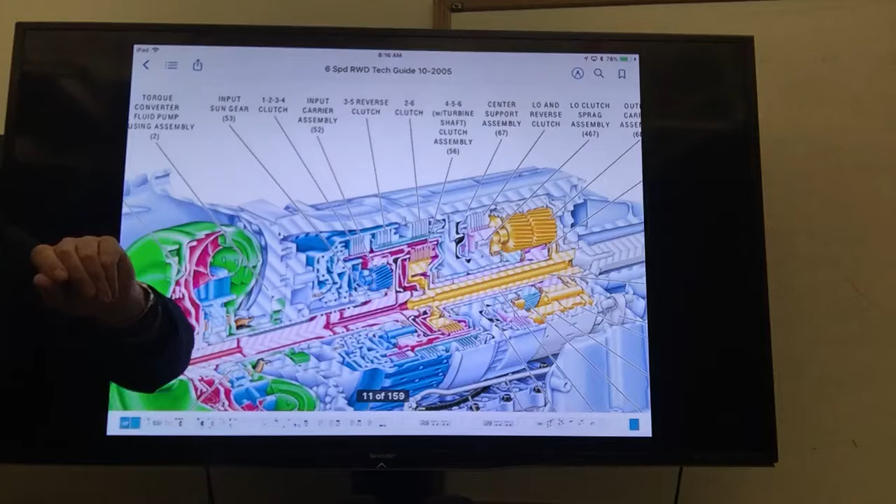So looking at this transmission right now, there are some things already familiar to you. There are how many sets of multiple disc clutches in here? 1, 2, 3, 4, 5. Three of them were used to transmit torque, two of them were used to hold something from turning, so they're steels that bind to the case. It's very similar to what you saw in the 6T70s, where you had two that were used to transmit torque and three used to hold something from turning. But again, five sets of clutches.

And they're named in a similar fashion too, you'll notice that. The 1-2-3-4 clutch is used in first, second, third, and fourth, so you know that's going to be applied in those gears. The 3-5-reverse clutch, you know it's applied in third, fifth, and reverse. Your 2-6 clutch is going to hold something from turning. Your 4-5-6 clutch is part of that turbine assembly, so that's going to transmit torque to a component. Here's where things get a little different though.

The planetary gear set arrangement on this transmission is a little different from what you've seen in the past, and that's because it's using two planetary gear sets, but one is a compound planetary gear set.

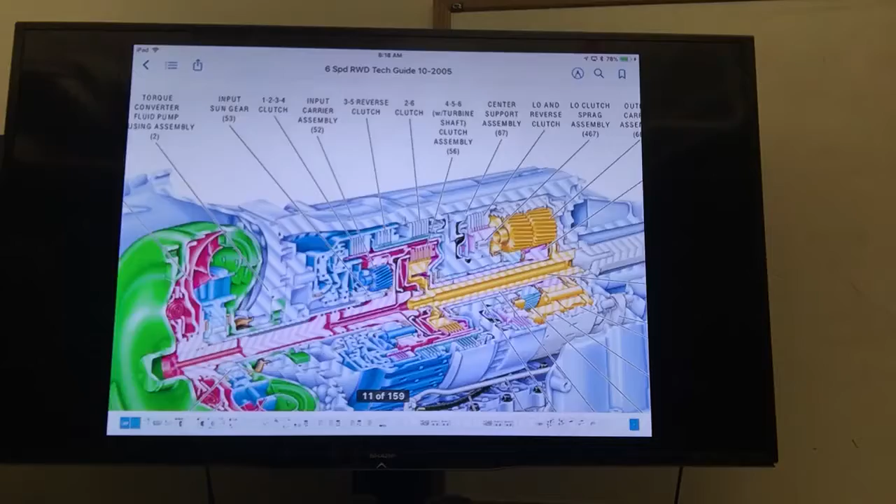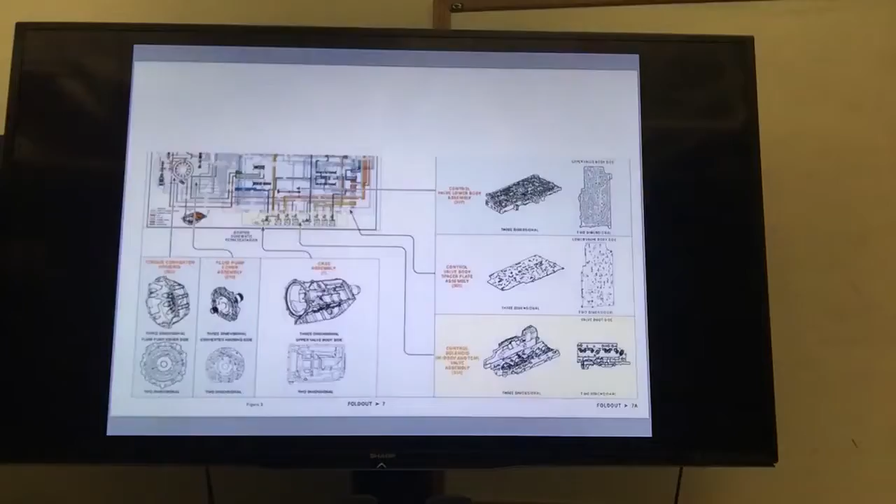So before we go on to the planetary gear sets, let's try to get a look at what these clutches are doing. There's another picture here I want to find that makes it a little easier to see. And I'm not finding it... yeah, that's the one I'm looking for.

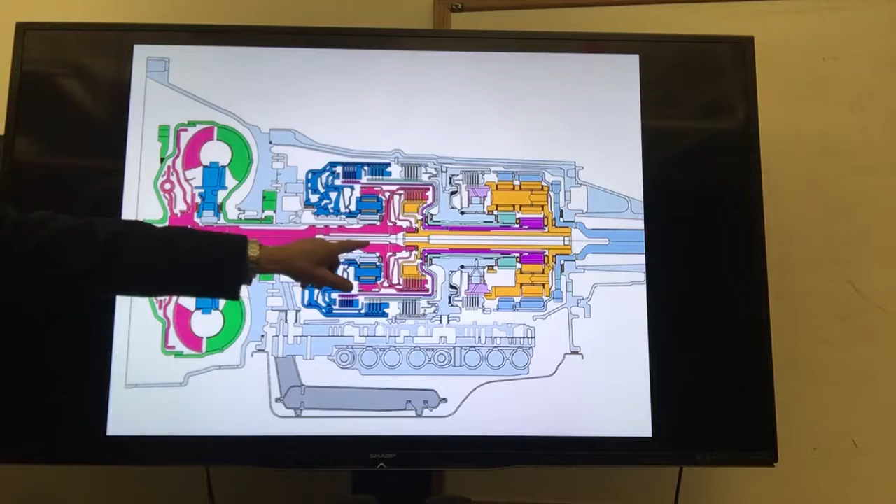So here's our, what was this, the 1-2-3-4 clutch? You guys have this opened up by any chance? You can open it up to keep me honest here. So torque is going to come into our turbine shaft, or input shaft assembly. That's going to be transferring torque to this housing, which is where that 4-5-6 clutch is. It's also transferring torque to this component here, which is the input internal gear.

So this is one of the planetary gear sets we have on this transmission. It's called the input planetary gear set. That suggests it's going to be an input for torque coming into the transmission, and it is, in fact — it's connected to the turbine shaft. So when our turbine shaft is rotating, we're going to be transferring torque to the input internal gear.

That's going to transfer torque to the input carrier pinion gears. The input carrier pinion gears are going to walk around the held input sun gear. The input sun gear is splined to the stator shaft on this, so that's kind of different — this input sun gear is splined to the case basically all the time. So all of our torque into the transmission is going to be going through that input planetary gear set.

The input carrier is going to transfer torque to this housing. The input carrier is the output. Whenever the carrier is an output, we get what? Reduction — so we're going to get some mechanical advantage there.

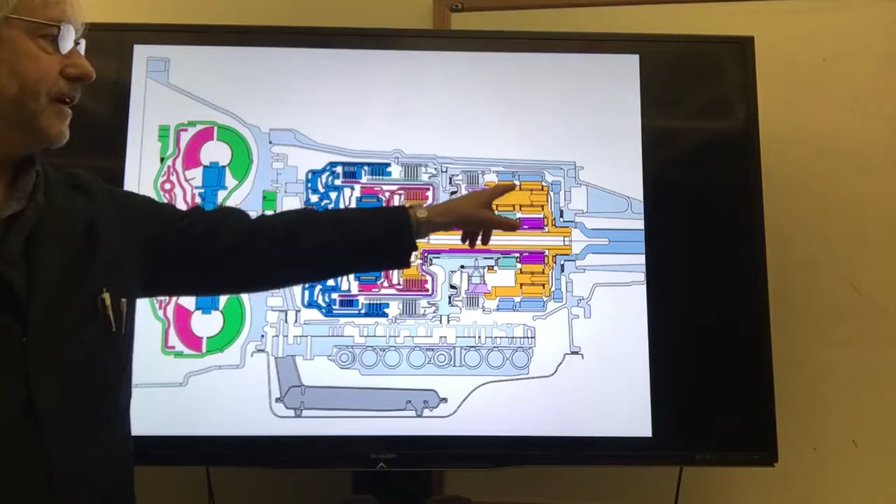Right here, notice that these clutches, which I think are our 1-2-3-4 clutches, are splined to this housing, which if you follow it comes all the way down — looking at the color now — to this sun gear. This is our second planetary gear set. It's a compound planetary gear set, a Ravigneaux planetary gear set, as it's called.

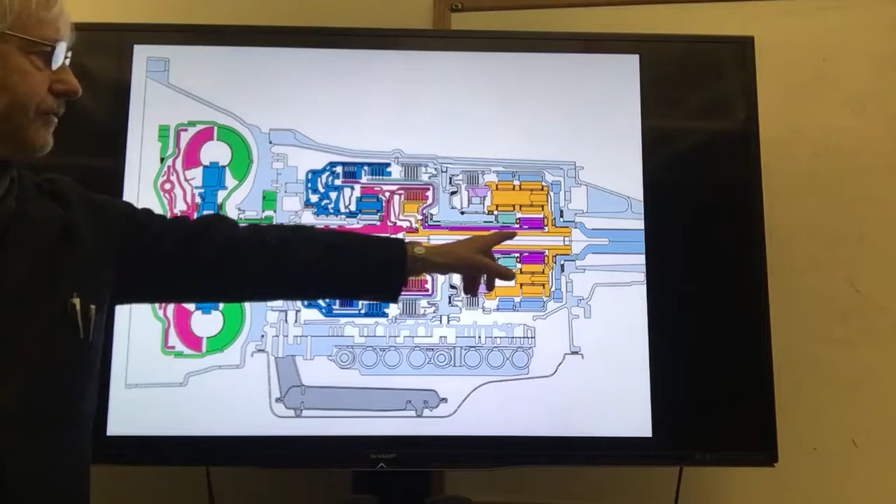That's unique. This is different than what you've seen in the other transmissions you've looked at. This housing is going to transfer torque to that sun gear, the output carrier rear sun gear.

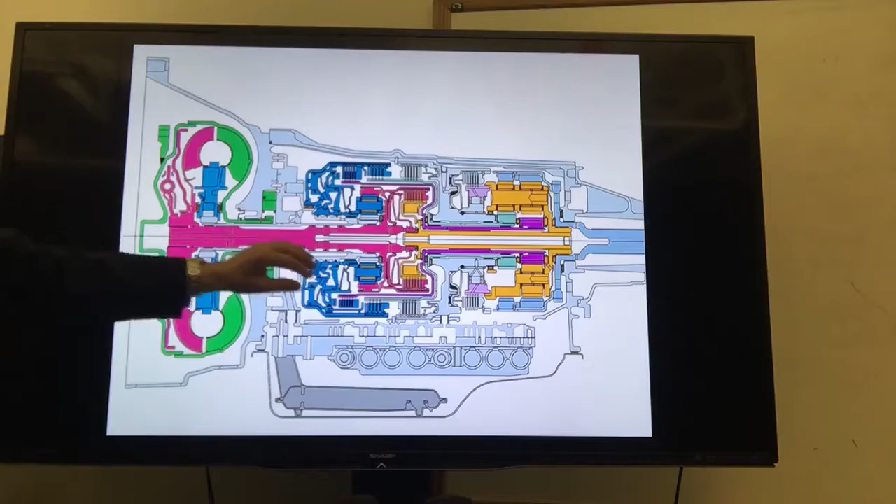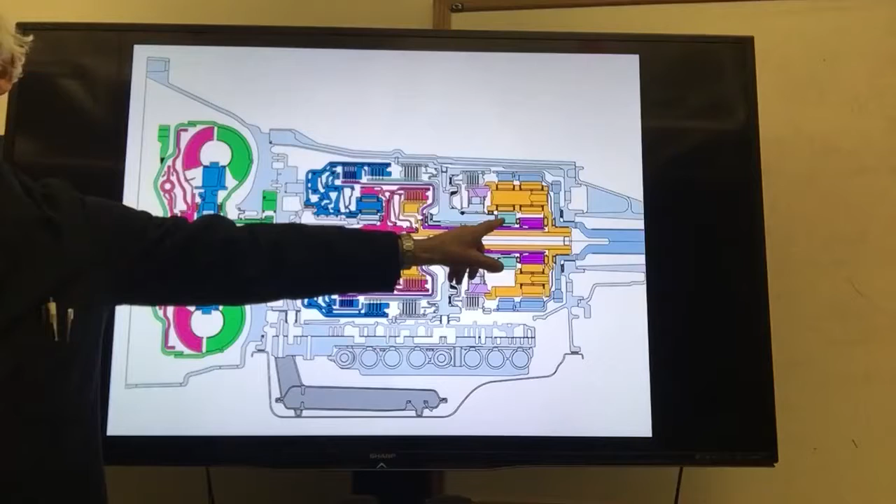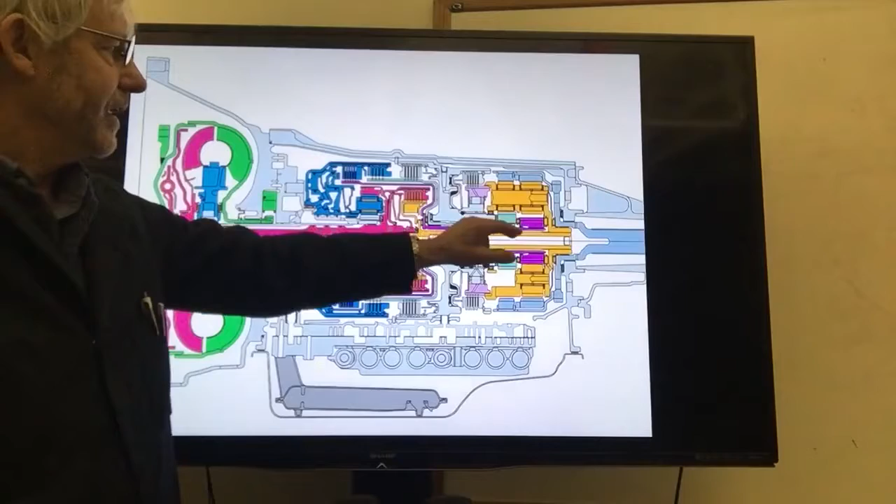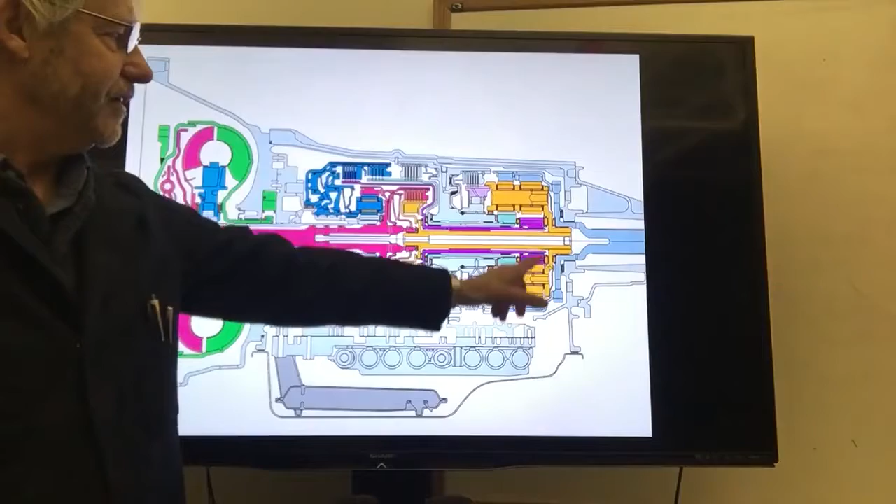This is called the output carrier. We have an input planetary gear set and an output planetary gear set. The output planetary gear set has an output sun gear rear and an output sun gear front. It also has a planetary gear set with multiple pinion gears connected as one piece. I'll show you another picture in a minute so you can see that. Then we have our output internal gear, which is in mesh with both the output rear outer planetary gears and the output front planetary gears. So our planetary gears here include output rear inner planetary pinion gears and output rear outer planetary pinion gears.

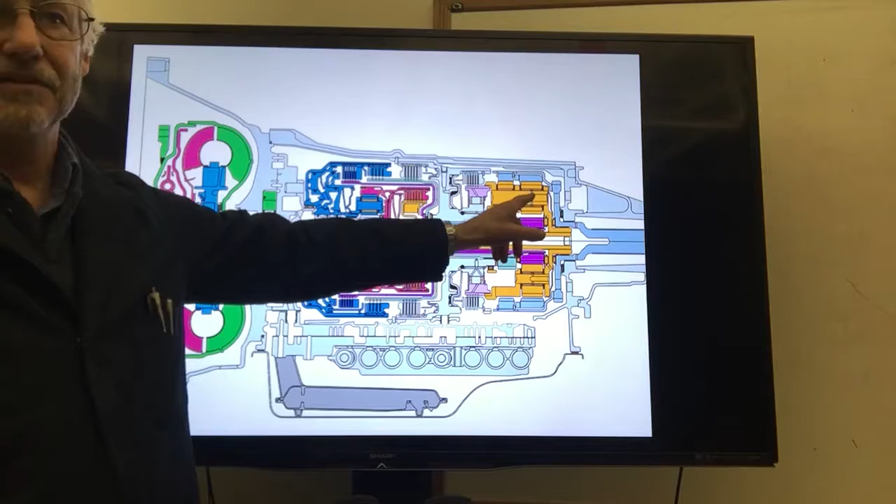We're going to revisit that again in a second. In first gear, we have clutches 1, 2, 3, 4 applied, and our low reverse clutch is applied for first gear engine braking. But for first gear without engine braking, this clutch is released.

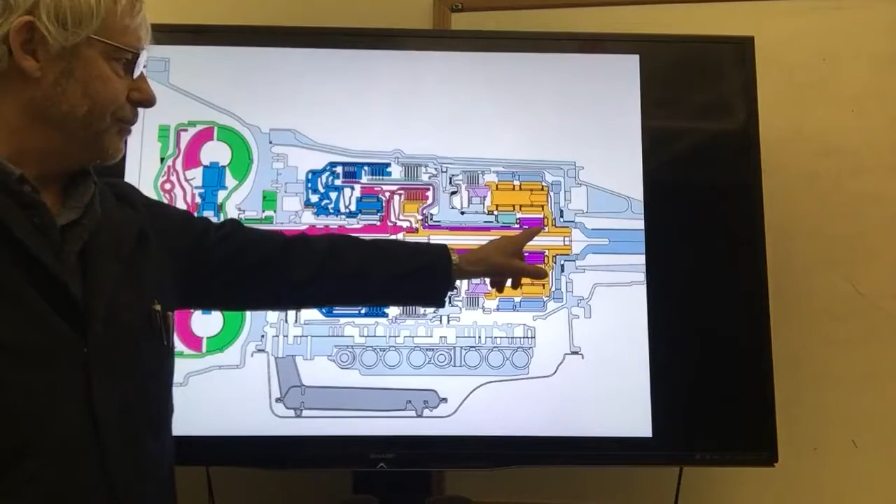Here's where some things are going to look similar, because we're transferring torque from the input planetary gear set to the output sun gear, the rear output sun gear. That's going to transfer torque to our rear output inner pinion gears, which then transfers torque to our rear output outer pinion gears, and then to our rear output internal gear for first gear.

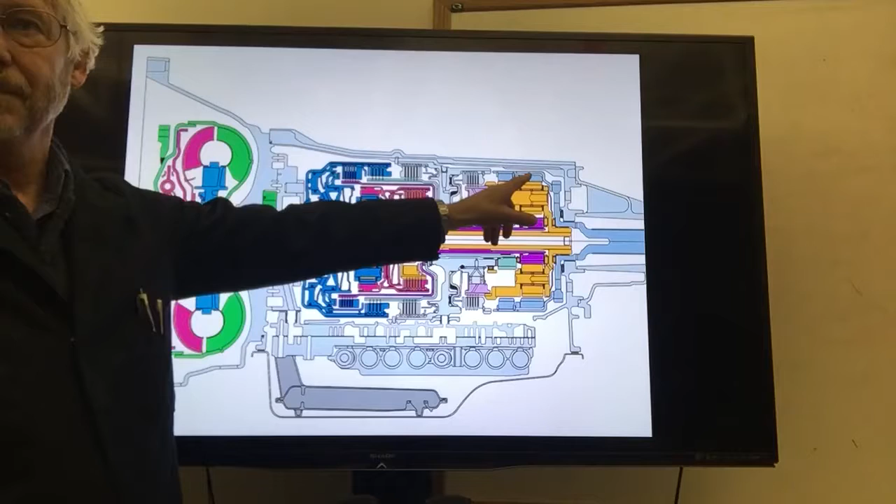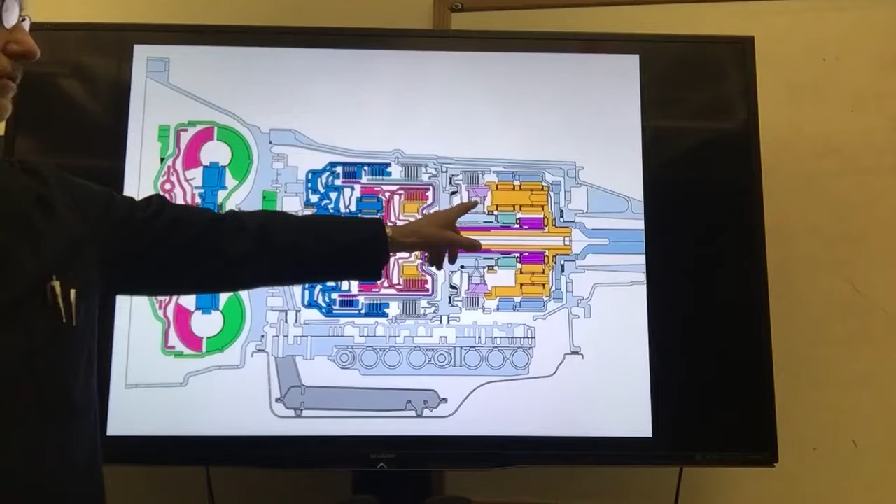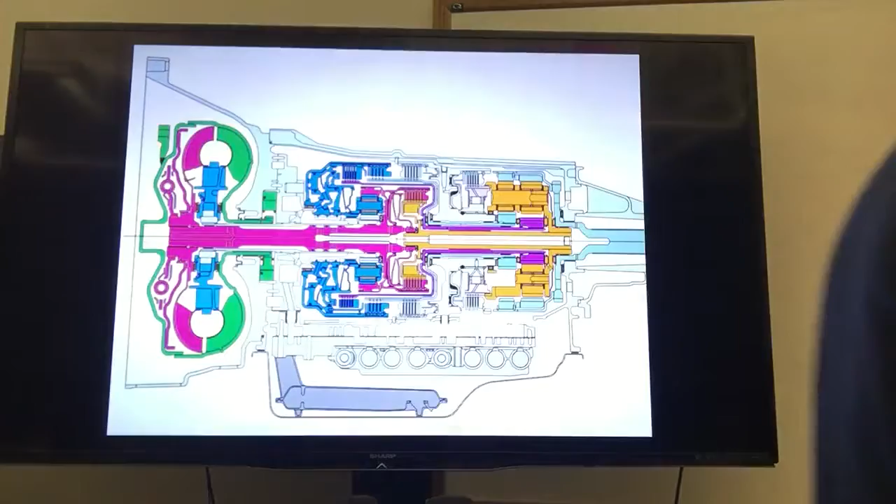But here's the thing that's kind of unique: the carrier in this case is being held by the low reverse roller clutch. So the carrier is being held for first gear. What does that say to you guys? Remembering what I've told you in the past, if the carrier is being held, what do we get? What about that?

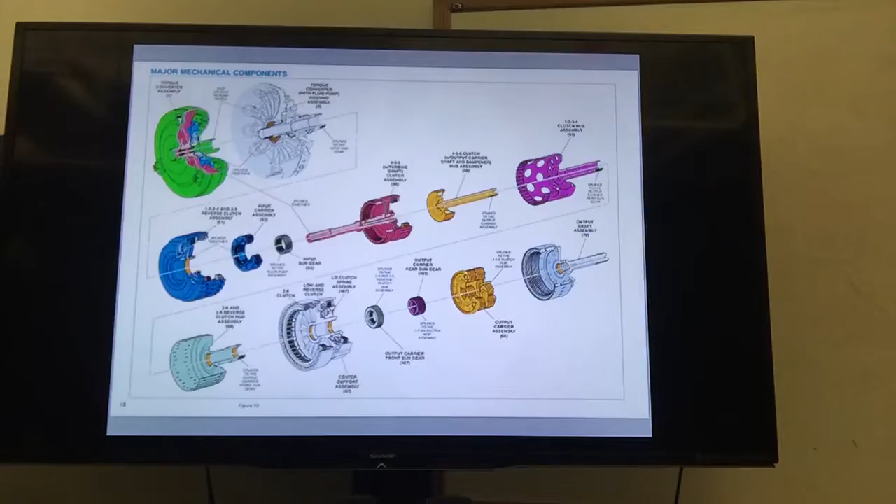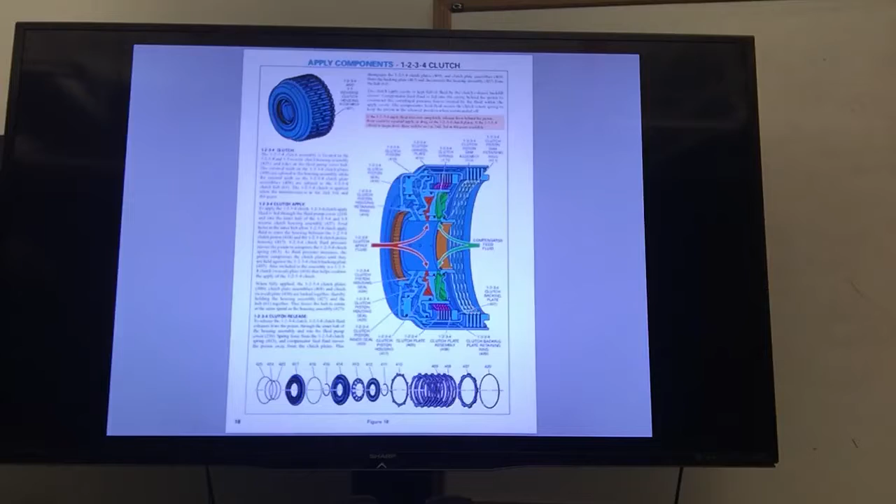Here's why that doesn't happen. Let me show you the other picture. I think I found the guide. You found it? Yeah, I was looking for 6L, and it's just a 6-speed rear-wheel drive. Yeah, you're right. I was like, it's not here. So then I went to go look at yours to see if I could just find a disassembly. And then I realized what I was doing. Again, the guide is really good, guys, for understanding how this system works.

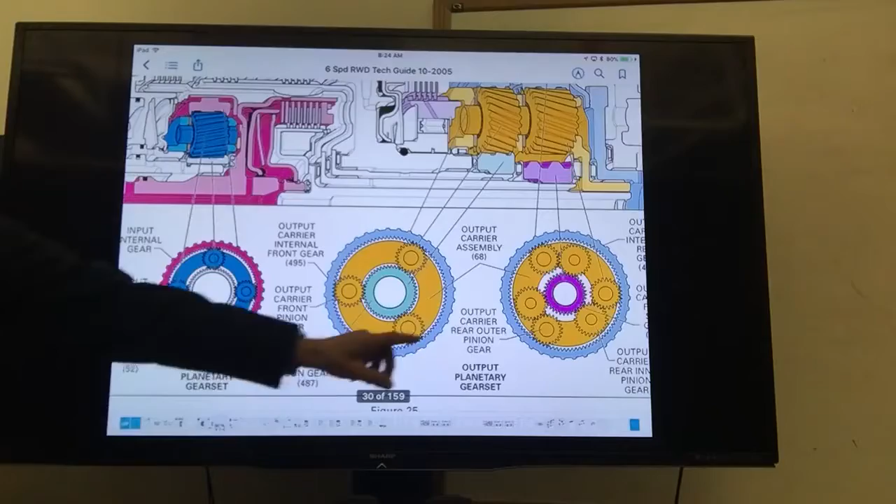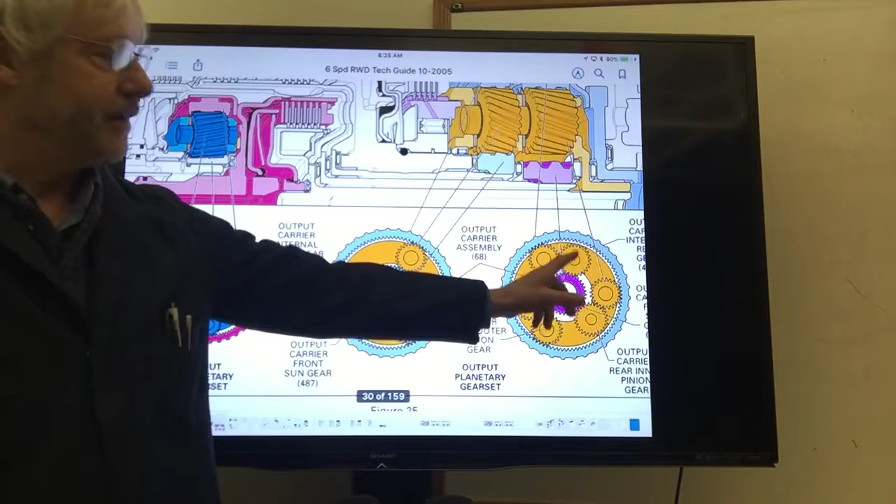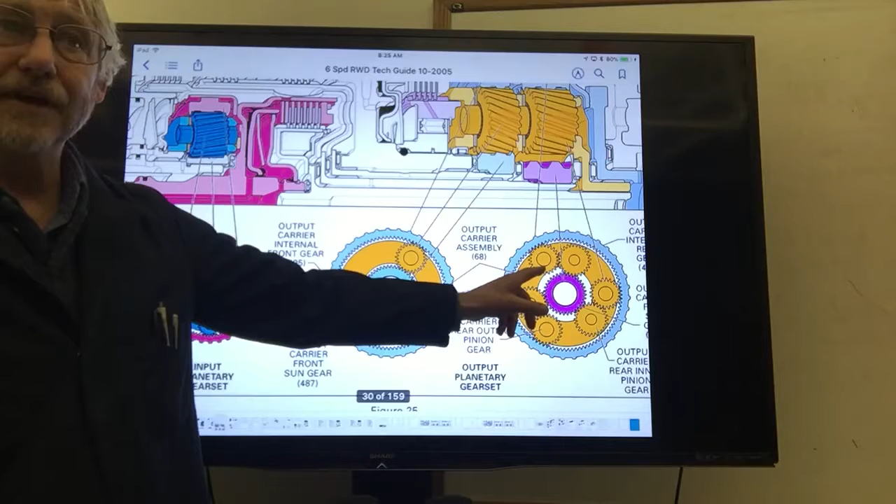So what I'd like you to notice is the rear output sun gear, the purple one, remember? That's the one we're transferring torque to in first gear, and it's going to transfer torque to our rear output inner pinion gears. The carrier is being held by that low reverse clutch, the low roller clutch. The rear output inner pinion gears transfer torque to the rear output outer pinion gears, which then transfer torque to our rear output internal gear, connected to our output shaft for first gear. So the carrier is being held, but we're not getting reverse. Why?

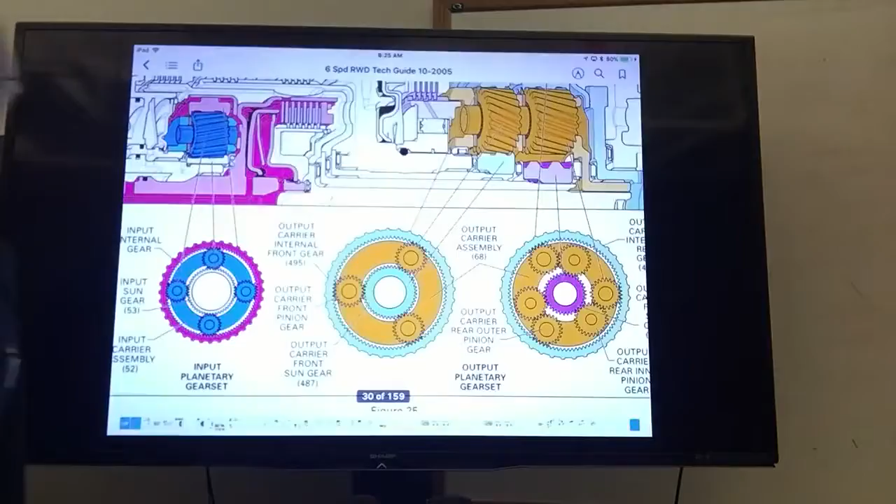So we're transferring torque to this sun gear. That's going to cause these pinion gears to rotate in the reverse direction, right? Did everyone see that? So the inner pinion gears transfer torque to the outer pinion gears and change direction again, so now we're moving in a forward direction. Those transfer torque to the internal gear in a forward direction. So we got some reduction from our input planetary gear set, and some reduction from our rear output planetary gear set, to get our 4-point-something to 1 reduction for first gear.

So whenever you hold the carrier, you get reverse — this is one of those statements that is true, except for when it isn't, in which case it won't be. That's because of the type of carrier we're using here, the Ravigneaux gear set. This arrangement, by the way, has a name as well, and that is the Lepelletier gear set.

Lepelletier, nice French name for you. That's the name of this gear arrangement, where you have an input planetary gear set with a fixed sun gear, and a compound planetary gear set, which is a Ravigneaux gear set in the rear, connected together. This is a Lepelletier gear set, which was developed around 1991. So the Europeans were using it before GM was. When GM came out with the 6-speed, they started using it.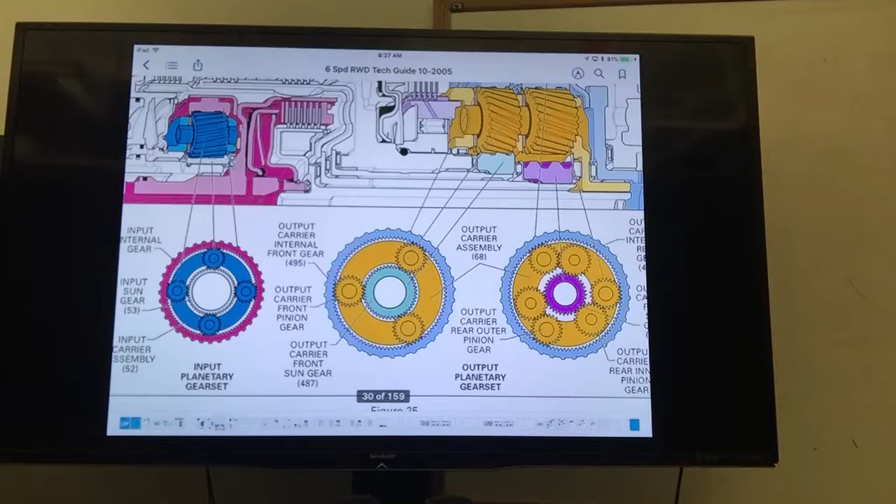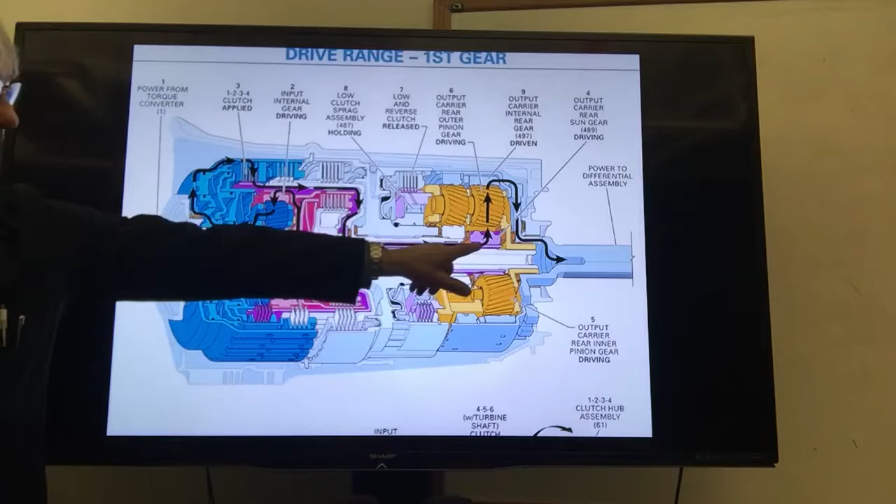So here's your first gear power flow. Again, our input shaft coming in, transferring torque to the input internal gear, to the carrier pinion gears, which walk around the held input sun gear, transferring torque to this housing. Our 1, 2, 3, 4 clutches are applied, and they transfer torque down to our output sun gear, to our planetary gear sets, to our internal gear, and then to the output shaft. So all of the torque to the output shaft is going to come through those 2 internal gears, the output internal gears, which are connected together.

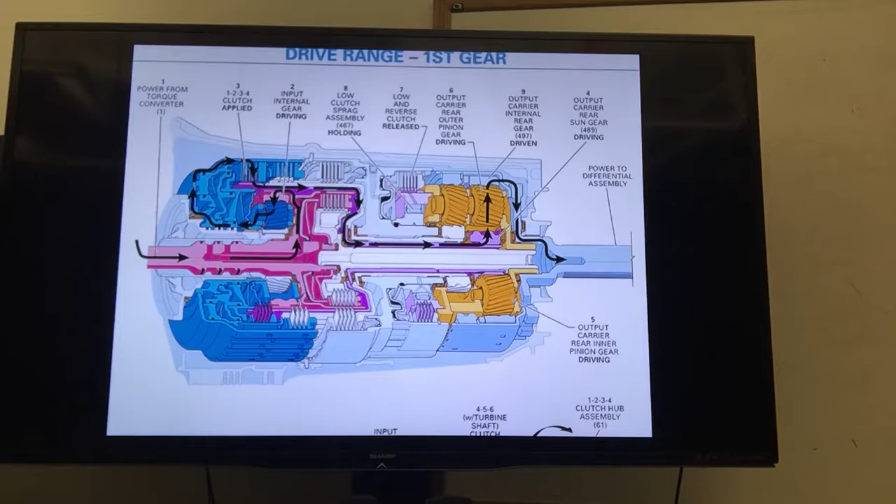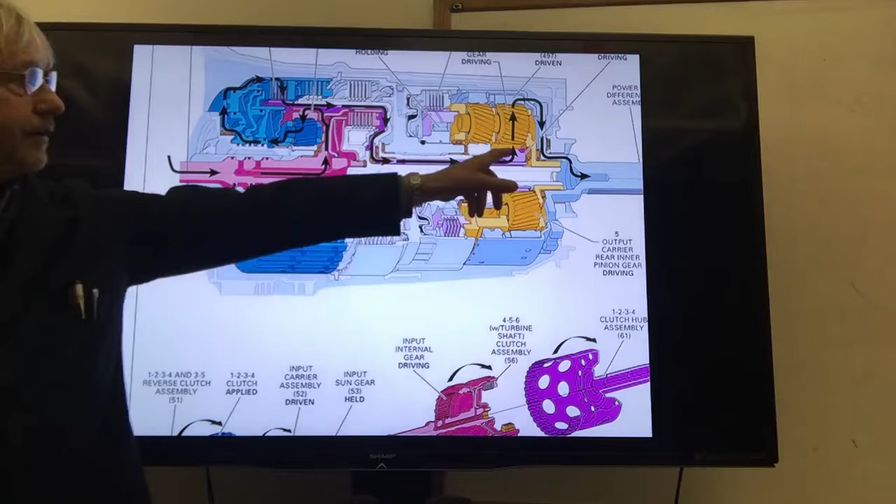But we can get different ratios because what you'll notice when you looked at those planetary gear sets is that the sun gears are different diameters. So I guess you can see it right here. There's our rear output sun gear, here's our front output sun gear. So they're different diameters, so which one we transfer torque to is going to change the ratio that we transmit to our output internal gear.

And we don't have engine braking because we're using a one-way clutch, until we apply the low and reverse clutch, which will provide us with some engine braking.

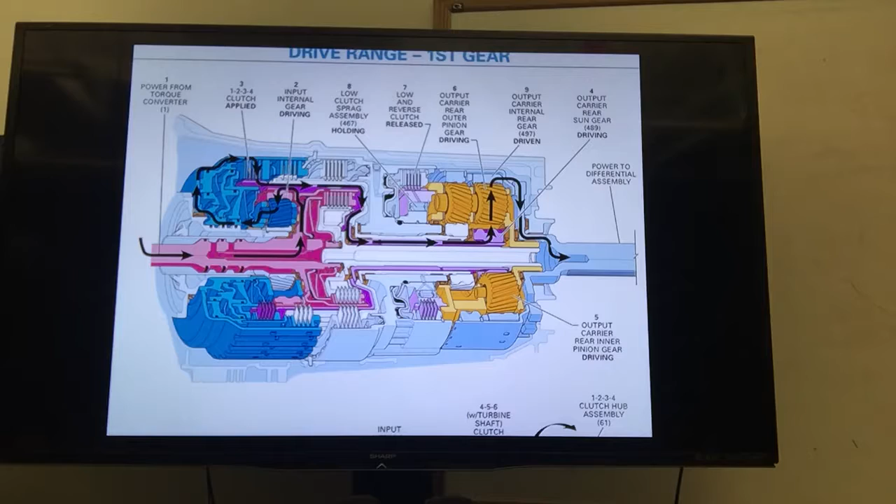So what's different in second gear, guys? So in second gear, again, our turbine shaft, we're transferring torque into our turbine shaft, into the input internal gear, to the input carrier pinion gears, which walk around the sun gear, so that's no different. We get our gear reduction there.

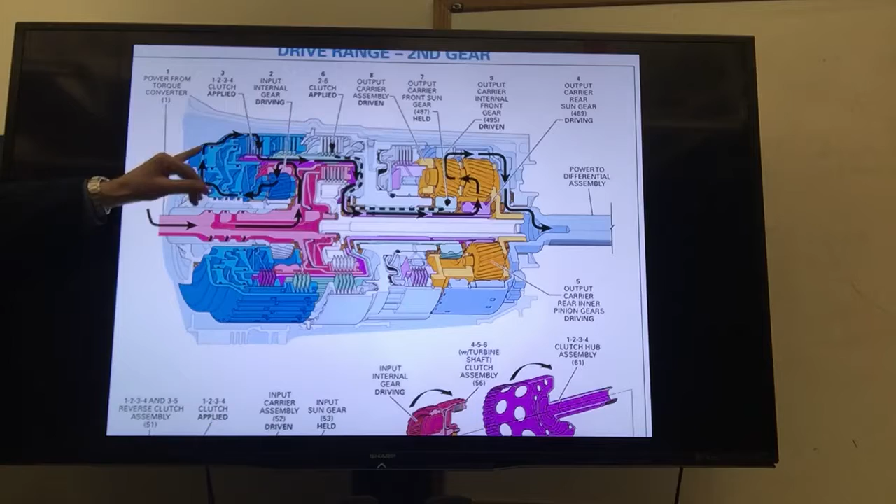Our 1, 2, 3, 4 clutch is still applied, so we're transferring torque to our rear output sun gears still. And we're transferring torque to our pinion gears, but what's different now is, well, you guys tell me, what is different now? Of first gear.

If you have your books open, if you have this book open, you can look at it closer, perhaps, moving back and forth. So first gear, we got a reduction here, and we got some reduction over here with our rear output planetary gear set. But what happened in second gear? What did we do different?

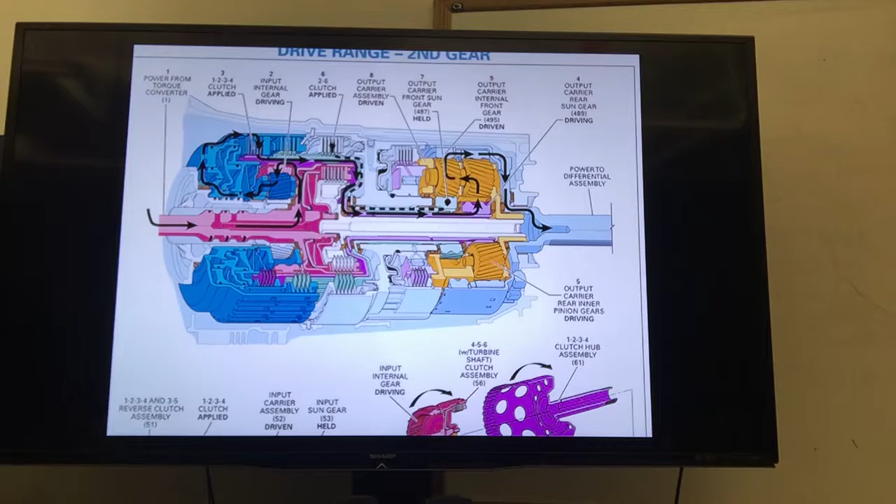Speak up, Zach. You're right, the 1, 2, 3, 4 clutch is applied. Yep, the 2/6 clutch is applied. All right, so that's what's different, isn't it? We applied the 2/6 clutch, which is doing what? Yes.

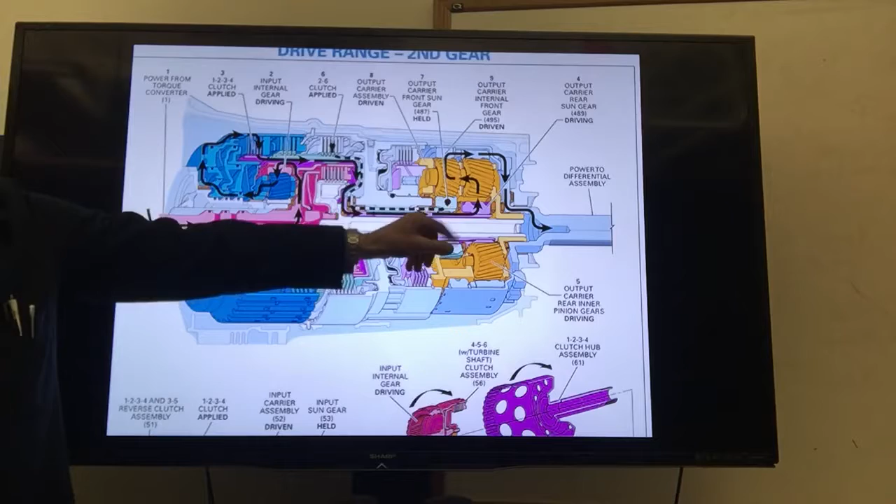Follow the dotted line. What is it holding? Austin? Okay, the output sun gear, right? The output front, output sun gear. So we're holding that now. So now our torque, our carrier is going to be forced to walk around that sun gear and transfer torque to our internal gear.

Do we have engine braking in this gear? Remember the general rule I gave you guys earlier? Well, what does the low reverse clutch do? Are we using the low reverse clutch in second gear? Are we using the low reverse roller clutch in second gear?

The one-way clutch? Yeah, we are. Because that's what, when the... we were using it in first gear. It was holding the output carrier, but are we using it in second gear?

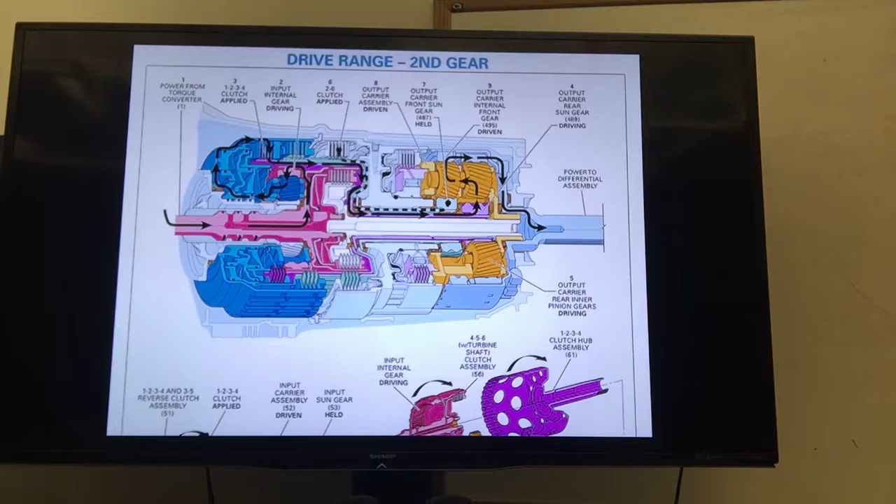Here's your little miniature range reference chart there, guys. Yeah, we are. We are... now we're not. Reverse, low clutch sprag.

It's not used. So the rule I gave you guys was, if you're using a one-way clutch to move the vehicle forward, then you will not have engine braking unless you apply something else that does the same thing as that one-way clutch. So in this case, we're not using a one-way clutch. So will we have engine braking? Will we be able to transfer torque back up to the engine?

You want to go like this? Yes, yeah, you will be able to, because we're not using a one-way clutch. So this thing has engine braking throughout its gear ranges. And that's true with the 6T, by the way, as well.

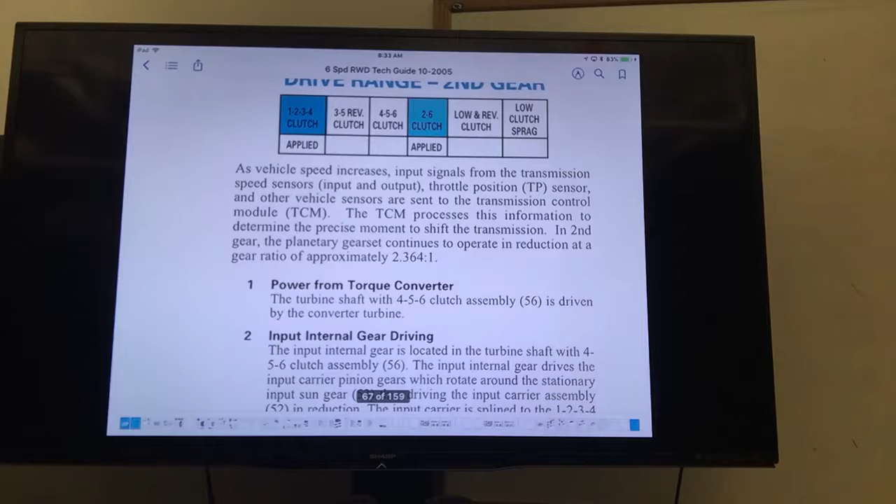What happened? What's different in third gear?

So obviously the 1-2-3-4 clutch remained applied. It's telling you that, but what did we do different? Third gear, 3-5 reverse clutch is applied.

2-6 is released. Good, because we need to have some stuff rotating here, so we can't be holding stuff from turning. Now third gear is not a 1-to-1 ratio in this transmission. Although, if you look at this for a second, the 1-2-3-4 clutches are applied, so they're transferring torque to the rear output sun gear. And the 3-5 reverse clutches are applied, so they're transferring torque to what? The front output sun gear.

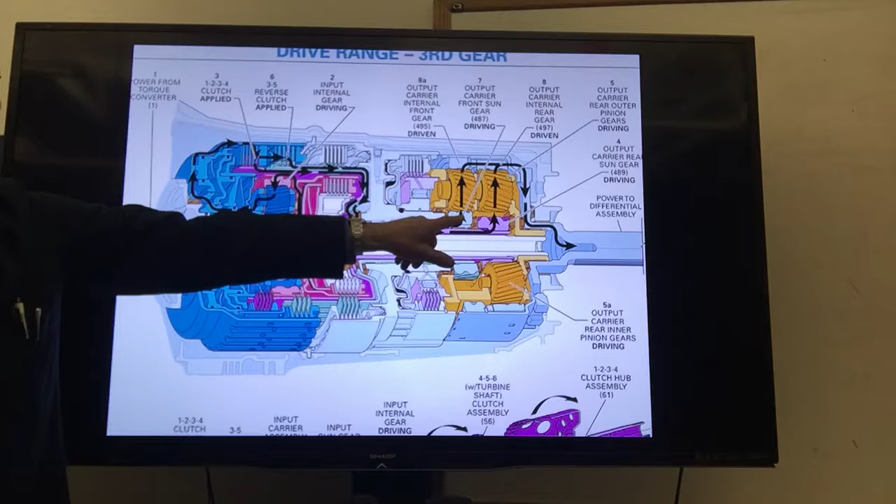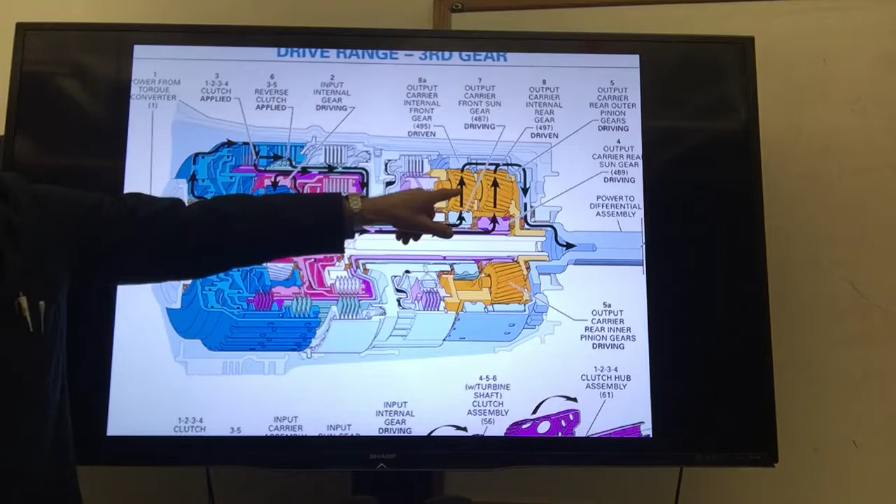So these two components are rotating in the same direction and at the same speed because they're connected to the same component. They're going to drive our carriers, our pinion gears, in the same direction, which are not going to be able to rotate. So they're going to kind of just act as wedges and transfer torque to our internal gear in the same direction and at the same speed.

So what ratio did I just describe? But I just told you we don't have 1-to-1 in it. Is it just less than 1-to-1? Why is it less than 1-to-1? Well, no, it's not less. Less than would be overdrive, right? No, it's just a little bit more than 1-to-1. Why would it be more than 1-to-1? Why do we have some reduction?

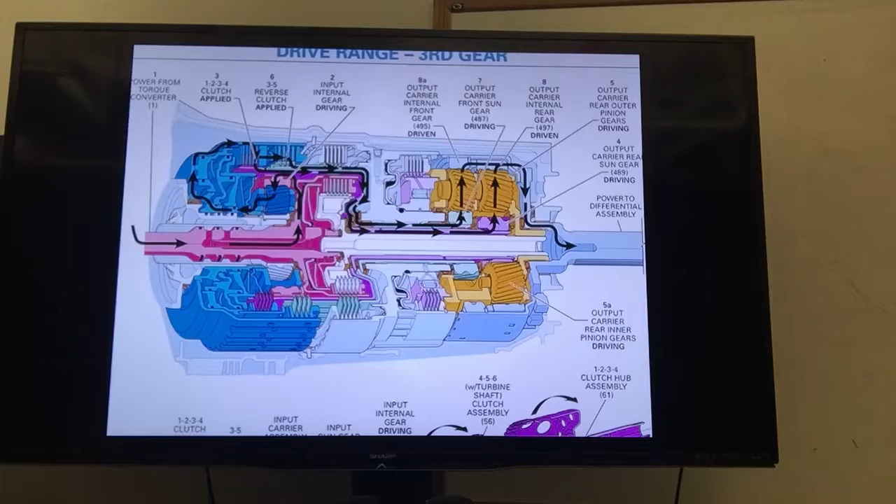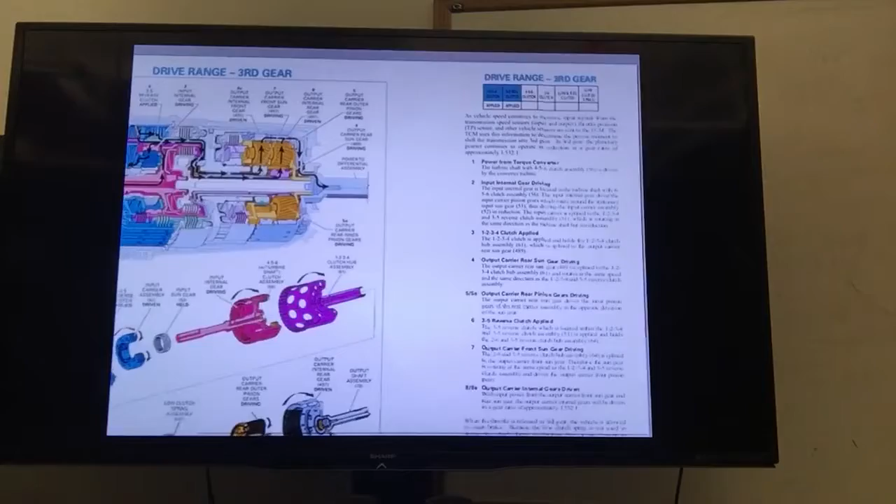Or less than, I guess less than 1-to-1 works. John? Why do we have some reduction? You know it. Is it because nothing's being held? Well, nothing is being held, but we're getting 1-to-1 through this planetary gear set, and yet our overall reduction is not 1-to-1, because you said we had like 2 planetary gear sets. Okay, so what's actually happening then?

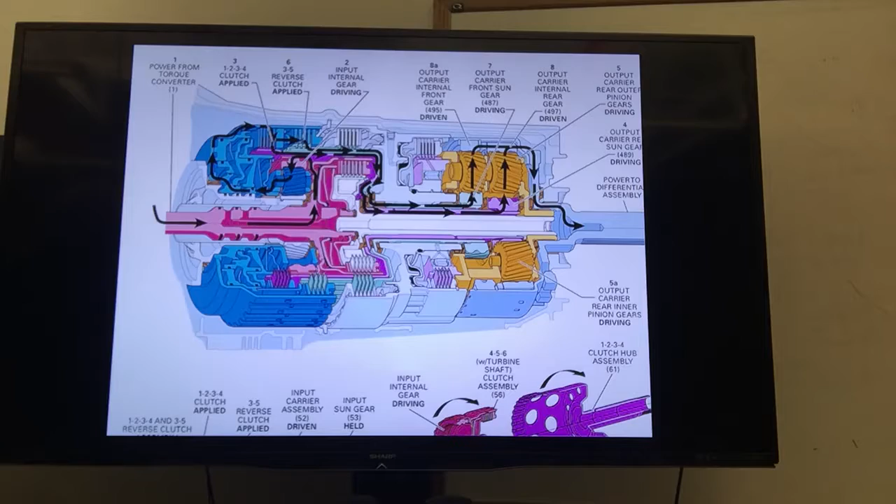This one's driving the second planetary gear set. This one? Which one? The first planetary gear set. What do we call that? Um, the input. The input. Yeah, the input. So we're getting some reduction through the input planetary gear.

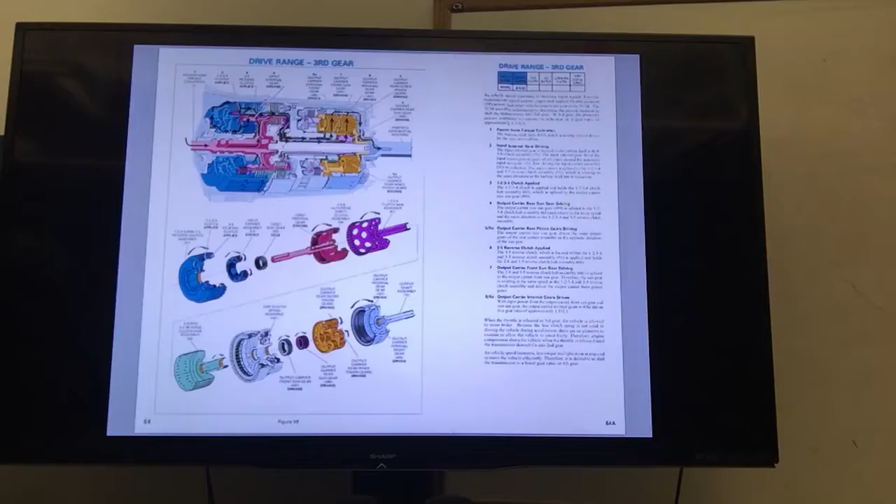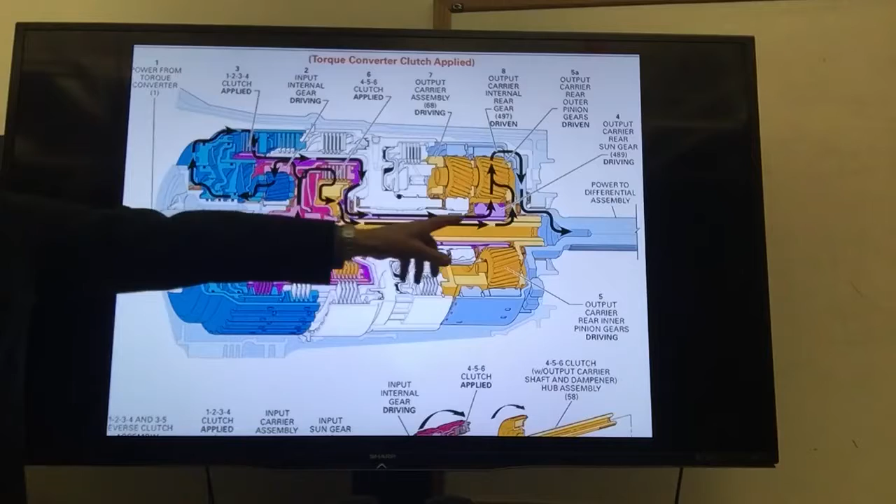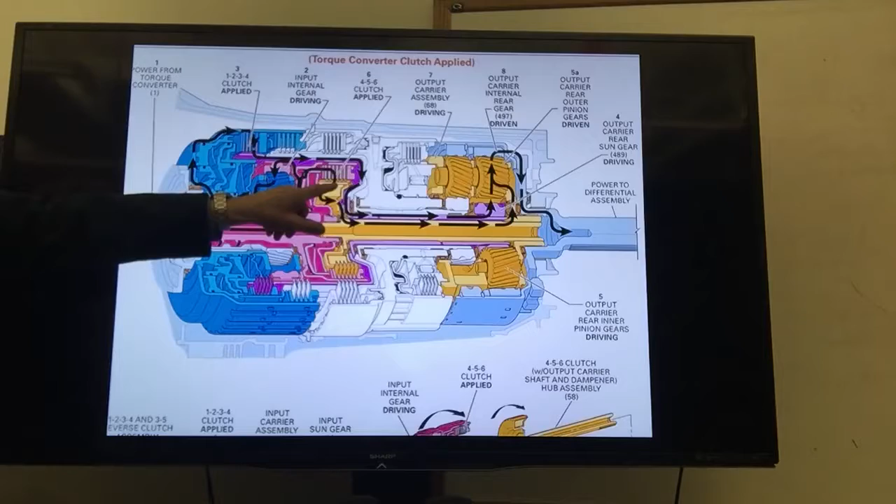So even though we're getting 1-to-1 out of our output planetary gear set, we still have that reduction through the input planetary gear set. And in fourth gear, what do we do different? We disengaged a set of clutches. The 3-5 reverse clutches are disengaged and the 4-5-6 clutches are. Good, yeah good. We applied the 4-5-6 clutches. So we're still transferring torque with the 1-2-3-4 clutches to our rear output sun gear. But now we're also transferring torque because we applied the 4-5-6 clutches. You can see that we're going to transfer torque to this hub, which is coming back and is splined to our output carrier assembly.

So we're rotating the output carrier assembly slower than... actually, hang on a second. Is it slower? No, it's actually faster. The output carrier is turning faster than the output sun gear, because that's not going through the input planetary gear set. So we bumped up our ratio a little bit, get a little less reduction.

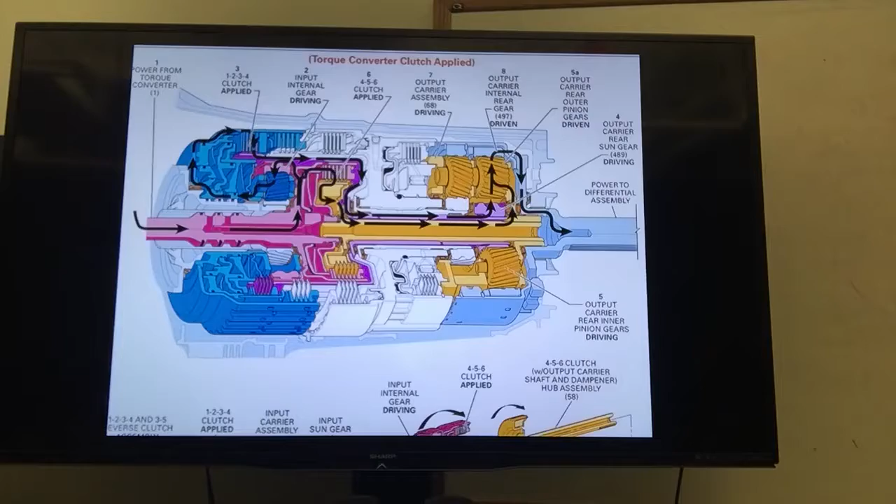So what do you think? Can you figure out power flow on any transmission at this point, just by looking at your blue books, looking at what's applied and what isn't applied? Look at what's connected to what. It's not all that difficult, is it?

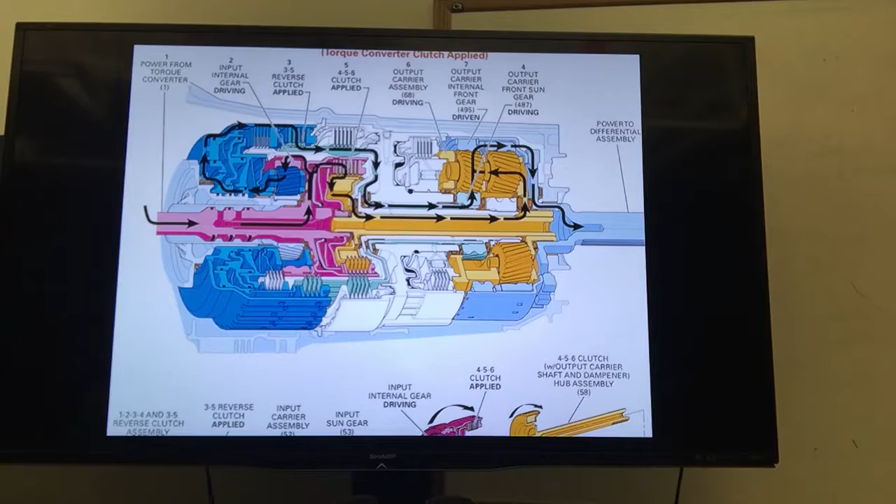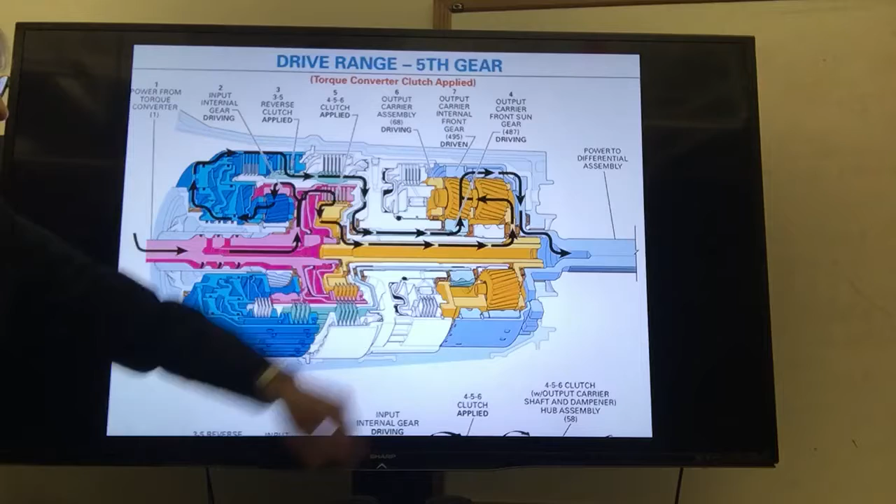In fifth gear, what's different? We released what? 1-2-3-4 clutch. Yeah, we released the 1-2-3-4 clutches. They're no longer transmitting torque. We still are transmitting torque through our input planetary gear set to this housing through the 3-5 reverse clutches. So we're still transferring torque now to our front output sun gear, and we're still transferring torque back to our output carrier.

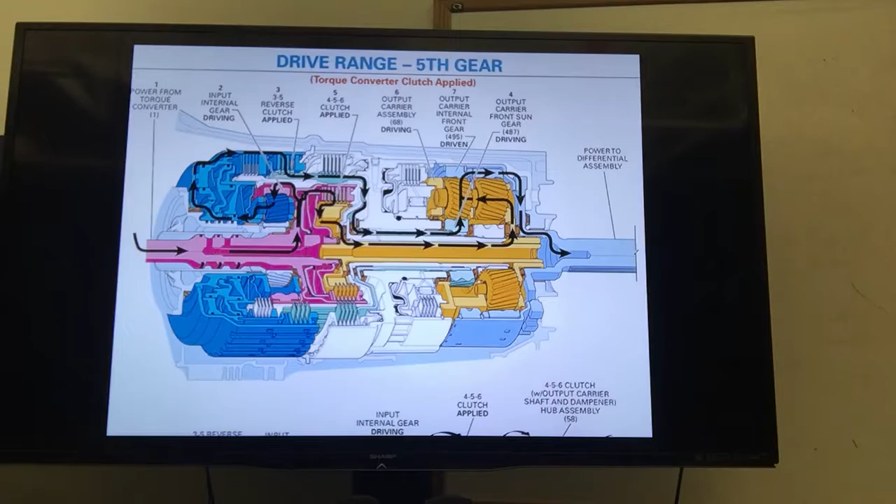But now the ratio is going to be a little different because the sun gear is a different diameter than the rear output sun gear. So we brought our ratio up a little bit. Then in fifth gear and sixth gear is overdrive on this. We have 2 overdrives, I believe anyways. Yeah.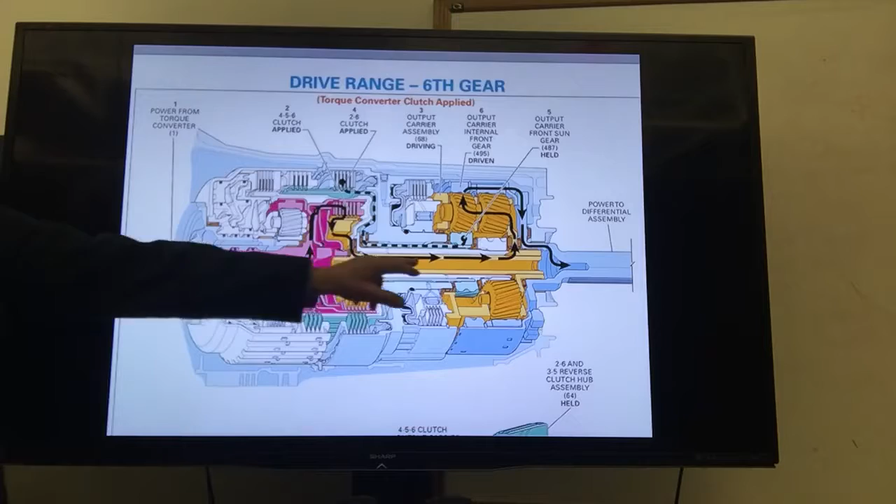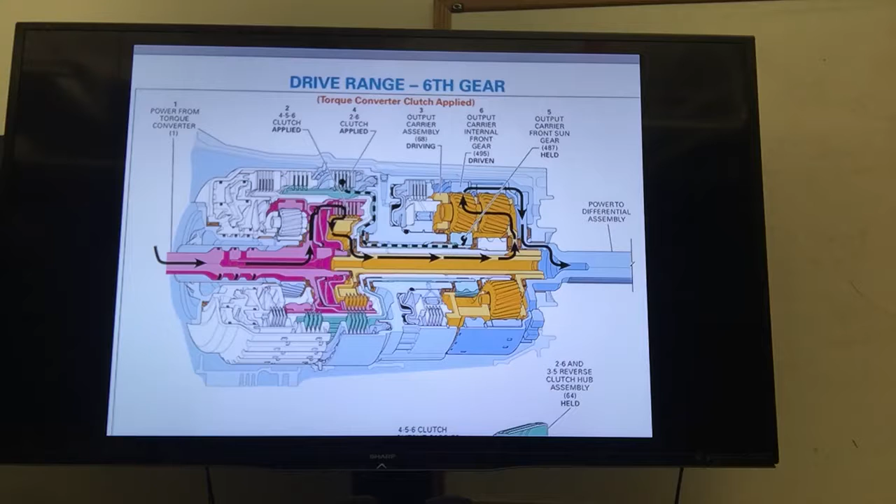The sun gear is held by the 2-6 clutch, which is applied, and the carrier is going to walk around the sun gear, transferring torque to our output internal gear in an overdrive ratio. So, pretty simple. And I think that's all I really wanted to talk about here before we go back to work.